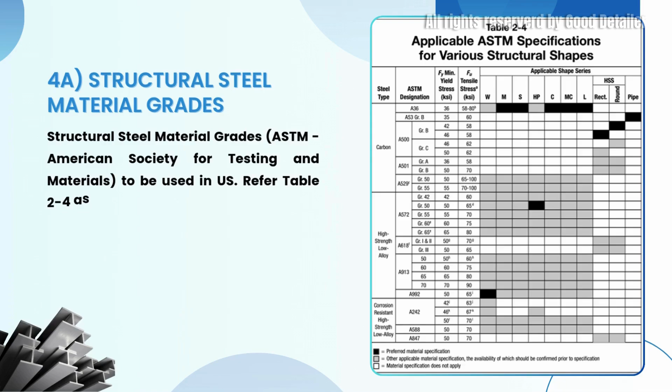4A. Structural steel material grades, ASTM, American Society for Testing and Materials, to be used in the U.S. Refer to Table 2-4 as shown in Fig 4.0.

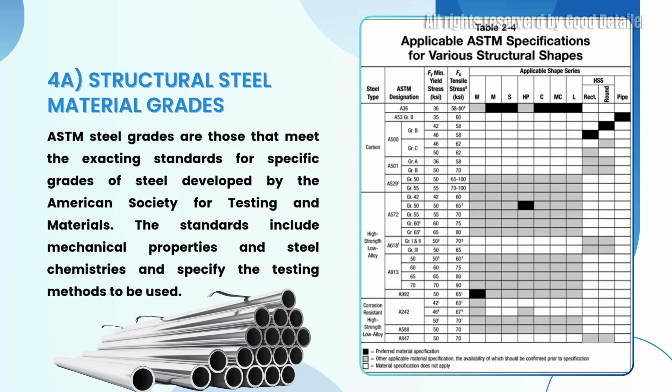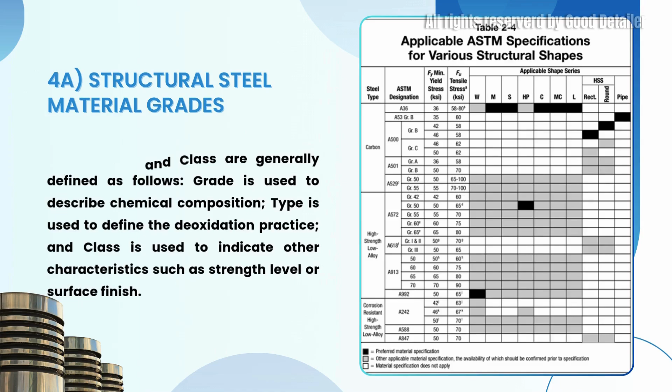ASTM steel grades are those that meet the exacting standards for specific grades of steel developed by the American Society for Testing and Materials. The standards include mechanical properties and steel chemistries and specify the testing methods to be used. Within the steel industry, the terms grade, type, and class are generally defined as follows: grade describes chemical composition, type defines the deoxidation practice, and class indicates other characteristics such as strength level or surface finish. However, within ASTM standards, these terms are adopted and used to identify a particular metal within a metal standard and used without any strict definition.

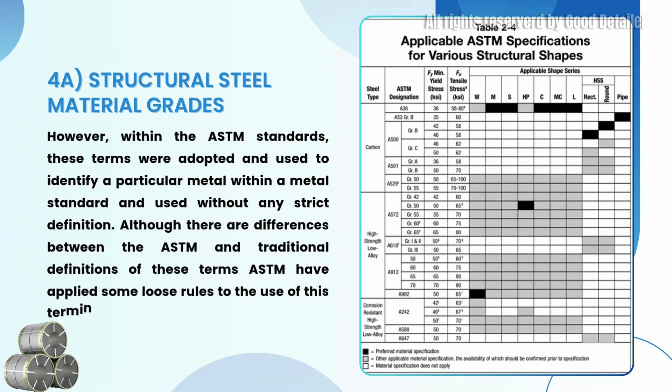Although there are differences between the ASTM and traditional definitions of these terms, ASTM has applied some loose rules to the use of this terminology in their designation system.

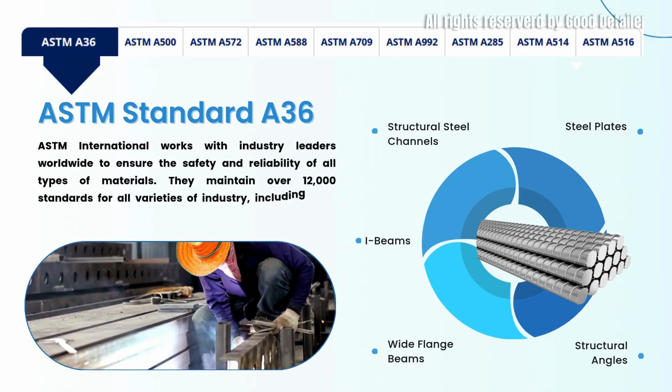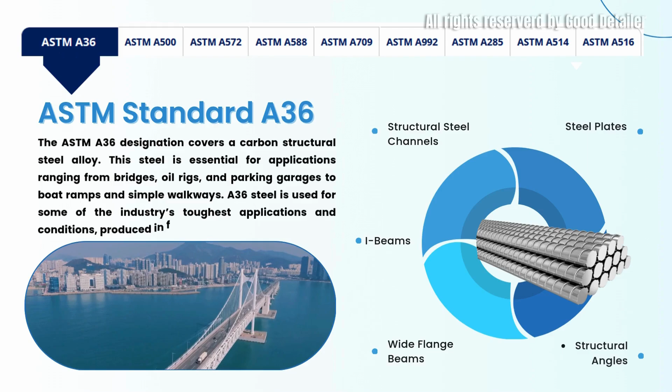ASTM Standard A36. ASTM International works with industry leaders worldwide to ensure the safety and reliability of all types of materials. They maintain over 12,000 standards for all varieties of industry, including steel components used in construction applications. The ASTM A36 designation covers a carbon structural steel alloy. This steel is essential for applications ranging from bridges, oil rigs, and parking garages to boat ramps and simple walkways. A36 steel is used for some of the industry's toughest applications and conditions, produced in forms that include structural steel channels, steel plates, wide flange beams, I-beams, and structural angles, essential for structural applications.

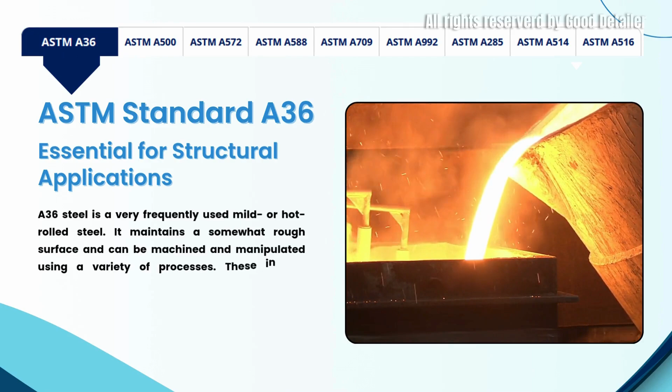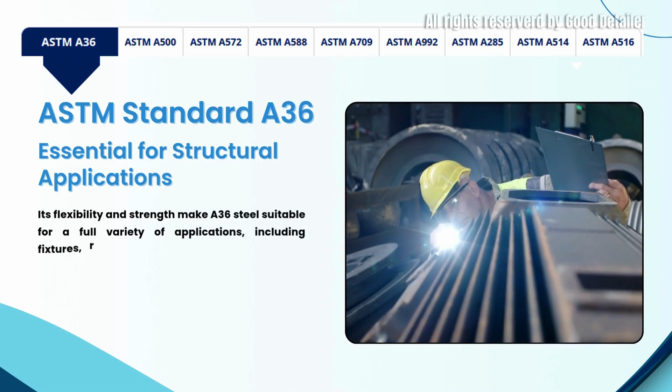A36 steel is a very frequently used mild or hot-rolled steel. It maintains a somewhat rough surface and can be machined and manipulated using a variety of processes, including multiple types of welding, as well as grinding, drilling, punching, and riveting. Its flexibility and strength make A36 steel suitable for a full variety of applications, including fixtures, rings, forms, tanks, bearing plates, cams, and gears, among many others.

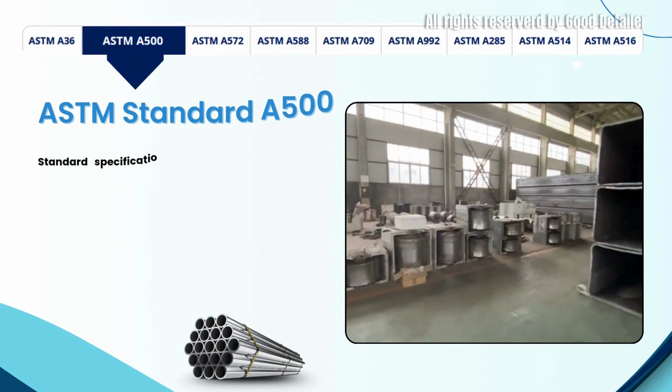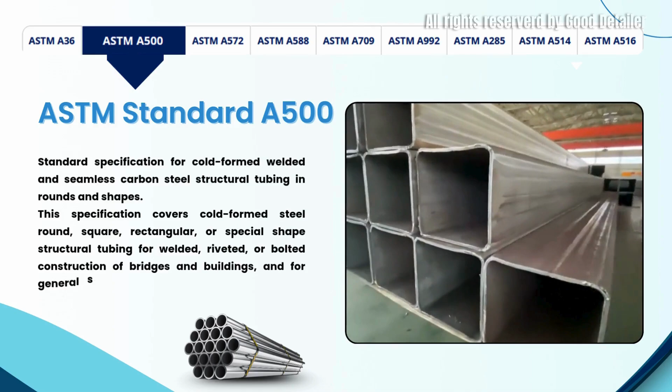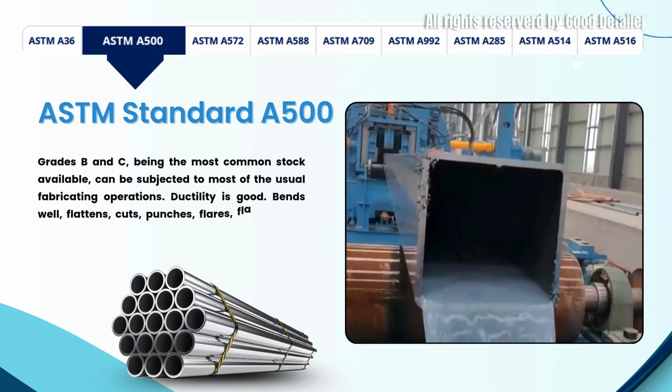ASTM Standard A500. Standard specification for cold-formed welded and seamless carbon steel structural tubing in rounds and shapes. This specification covers cold-formed steel, round, square, rectangular, or special-shaped structural tubing for welded, riveted, or bolted construction of bridges and buildings, and for general structural purposes. Four grades are produced, each having different chemistry and tensile requirements. Grades B and C, being the most common stock available, can be subjected to most of the usual fabricating operations. Ductility is good; it bends well, flattens, cuts, punches, flares, flanges, and welds easily.

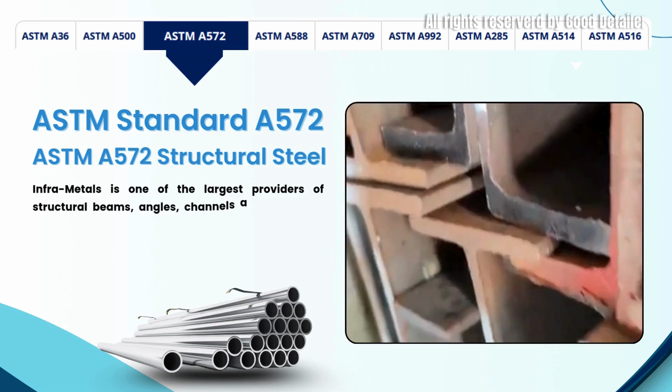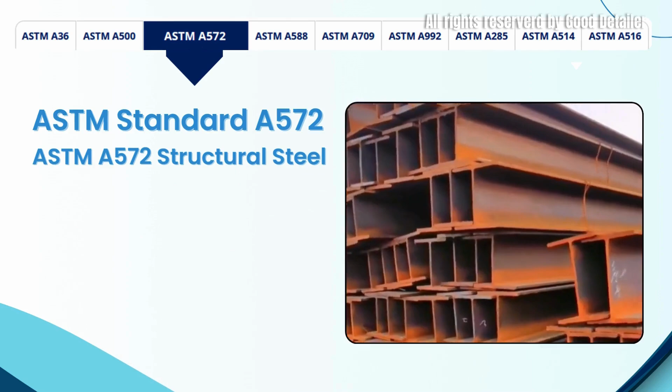ASTM Standard A572. ASTM A572 structural steel. Infra-Metals is one of the largest providers of structural beams, angles, channels, and more. Our company produces the industry's best quality steel for construction purposes. We specialize in providing ASTM products, meeting internationally recognized quality and consistency standards. One of the most frequently used materials we offer is ASTM A572 steel. A572 steel is available in 5 different grades: 42, 50, 55, 60, and 65. Each grade number indicates the yield strength of this high-strength, low-alloy steel. Its multiple favorable properties make it a staple for construction applications.

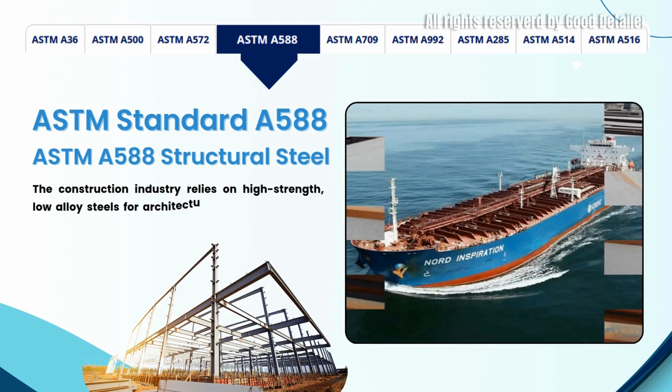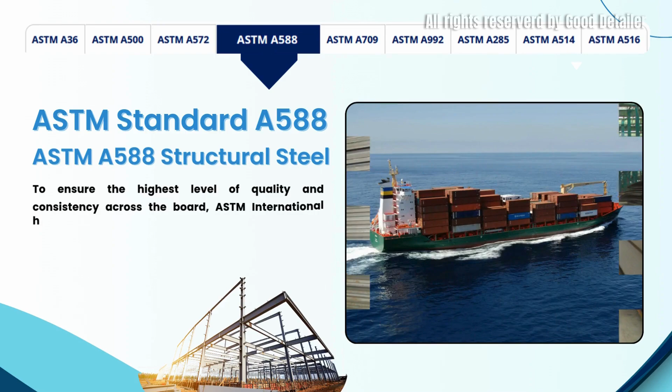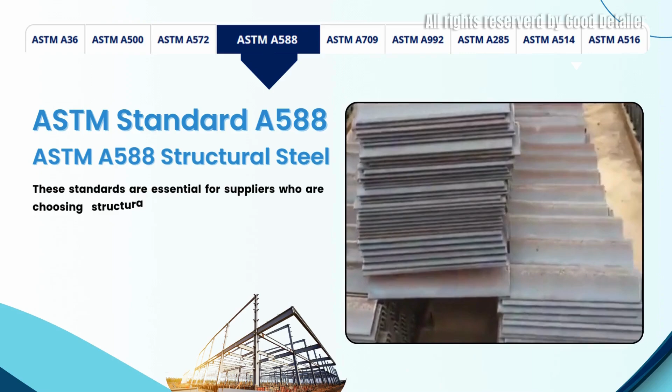ASTM Standard A588. ASTM A588 structural steel. The construction industry relies on high-strength, low-alloy steels for architectural projects that must endure the harshest outdoor environmental conditions. To ensure the highest level of quality and consistency, ASTM International holds more than 12,000 different standards that are adhered to by companies worldwide, ensuring quality and consistency across industries, manufacturers, and suppliers. These standards are essential for suppliers choosing structural steel, ensuring they receive premium quality metals and alloys such as ASTM A588 steel.

A588 maintains some of the best levels of performance for outdoor applications. ASTM Standard A709, ASTM A709 structural steel. At Infra-Metals, we lead the industry with our selection of high-quality ASTM-certified structural steels for the construction industry. ASTM International plays an essential role in ensuring that metals for construction applications meet the highest standards of consistency and quality. ASTM A709 steels are among the most sought-after materials for outdoor infrastructure. The composition of A709 ensures strength, long lifespans, and resistance to the harshest outdoor conditions.

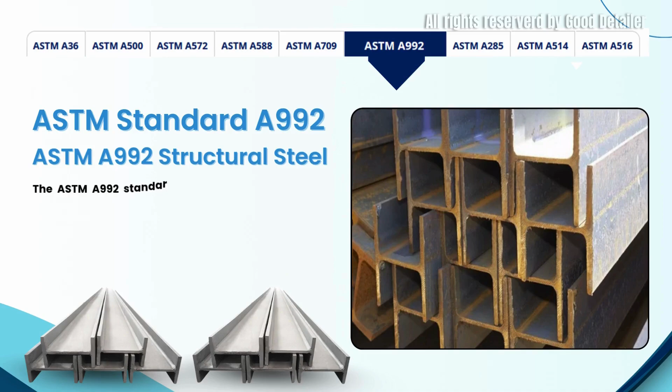ASTM Standard A992, ASTM A992 structural steel. The standards defined and set by ASTM International are essential for the construction industry. These standards help achieve consensus and maximize performance for a complete array of construction materials, including all types of steel alloys. The ASTM A992 standard specification is employed most frequently in building framing components such as I-beams and wide flange shapes. In addition to building frames, A992 steel is frequently found in bridge construction and other public infrastructure. This steel is defined by a mixture of elements that includes copper, vanadium, chrome, nickel, and molybdenum.

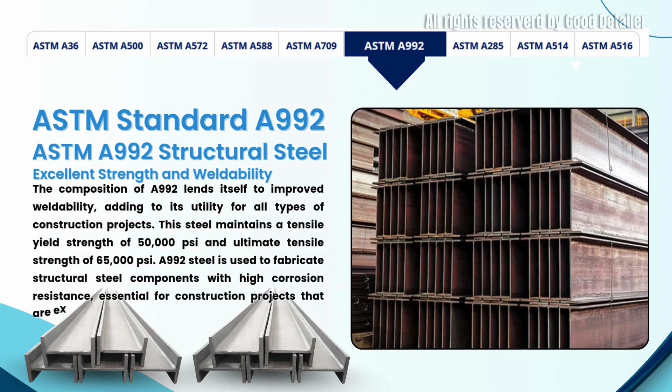Excellent strength and weldability. The composition of A992 lends itself to improved weldability, adding to its utility for all types of construction projects. This steel maintains a tensile yield strength of 50,000 pounds per square inch and ultimate tensile strength of 65,000 pounds per square inch. A992 steel is used to fabricate structural steel components with high corrosion resistance, essential for construction projects exposed to harsh weather conditions. Some of the forms we offer include I-beams, structural steel channels, steel plates, structural angles, and wide flange beams.

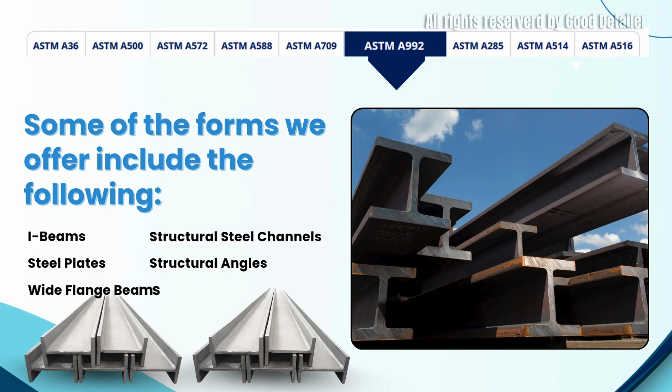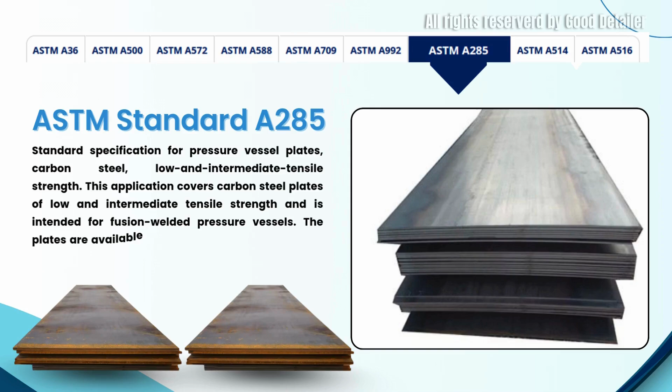ASTM Standard A285. Standard specification for pressure vessel plates, carbon steel, low and intermediate tensile strength. This application covers carbon steel plates of low and intermediate tensile strength and is intended for fusion-welded pressure vessels. The plates are available in 3 grades having different strength levels.

ASTM Standard A514. Standard specification for high-yield strength, quenched and tempered alloy steel plate, suitable for welding. This specification covers quenched and tempered alloy steel plates of structural quality, intended primarily for use in welded bridge construction and other structures.

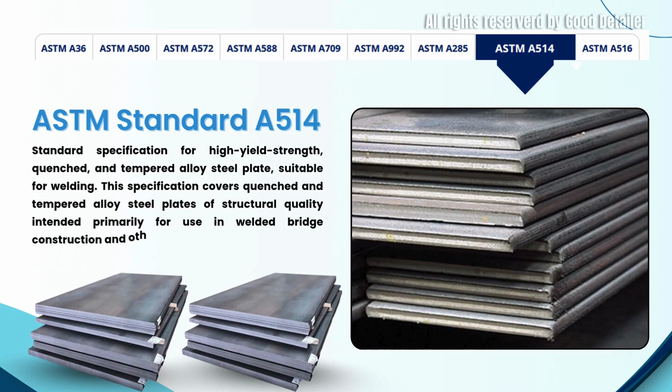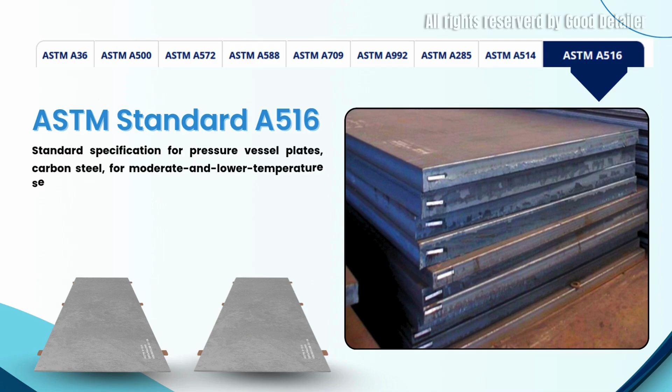ASTM Standard A516. Standard specification for pressure vessel plates, carbon steel, for moderate and lower temperature service. This specification covers carbon steel plates intended primarily for service in welded pressure vessels where improved notch toughness is important. The plates are available in 4 grades, each having different strength levels.